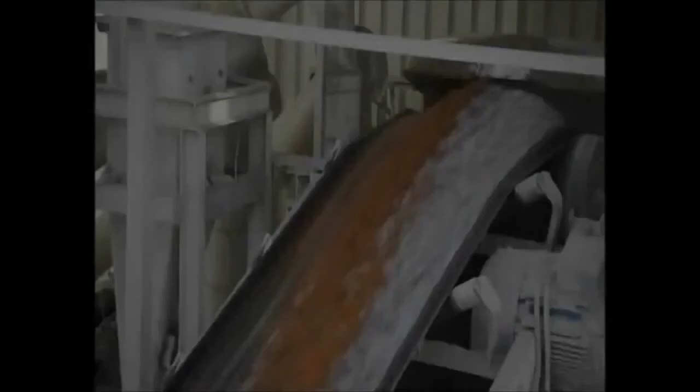Concrete. It's the most used building material on Earth. It was the building block of the Roman Empire. Today, it's the material for a new generation of gravity-defying skyscrapers. The raw ingredients that create this magic formula can be found in nearly every country on Earth.

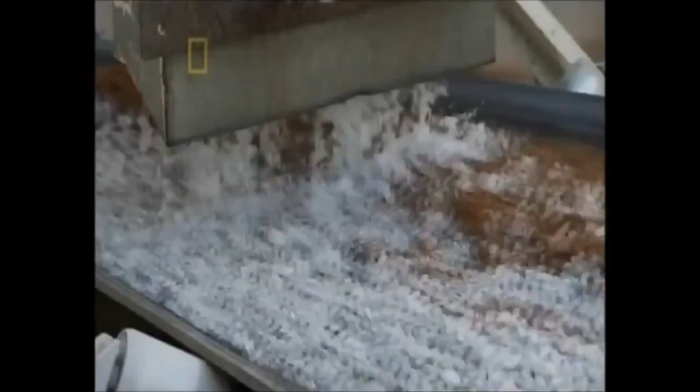Yet how these simple components are mixed together can make the difference between tragedy and triumph. From the mundane to the massive. From the ordinary to the extraordinary. Concrete helped pave the way for innovation and laid the foundation for the world's greatest civilizations. Now, go inside the science of concrete.

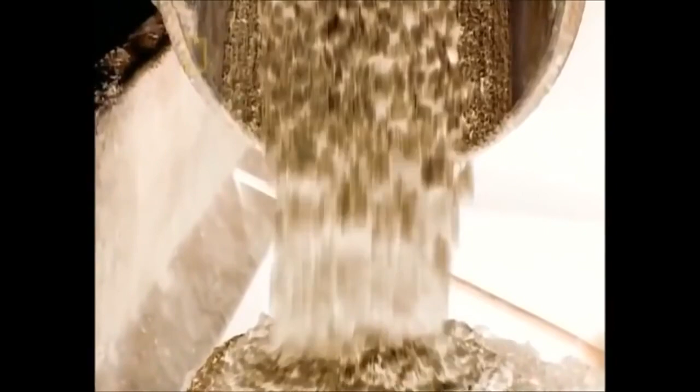It starts out like liquid. When it dries, it becomes stone hard. This amazing metamorphosis has earned concrete the nickname liquid rock. It has served as a cornerstone of engineering for centuries. And it's a highly prized tool of construction for a reason.

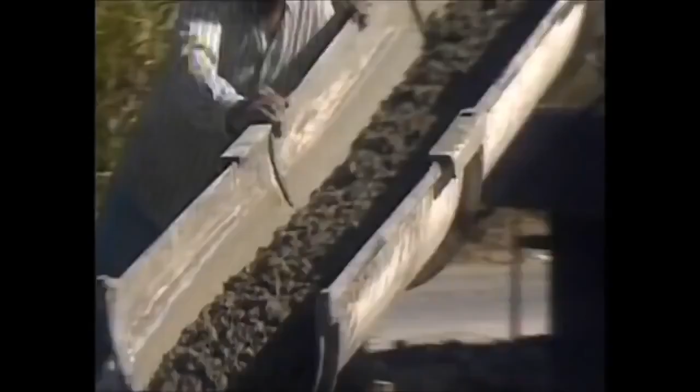It's easy to take concrete for granted. People see it in sidewalks and roads all the time, every day. But in fact, it is the closest thing to a miraculous material in construction that we've ever had. Concrete is everywhere. It has an almost unlimited engineering potential. It can take on nearly any shape and forms the backbone of a variety of the world's construction.

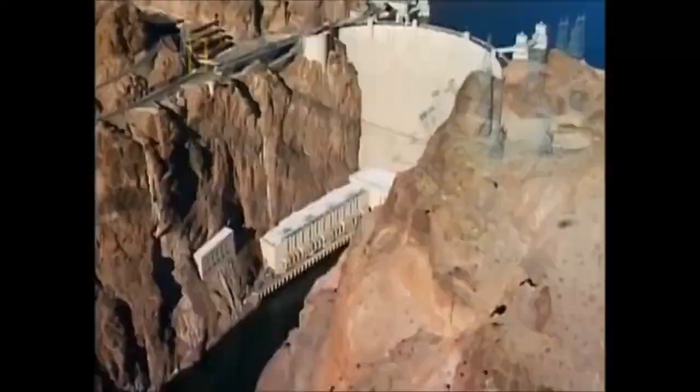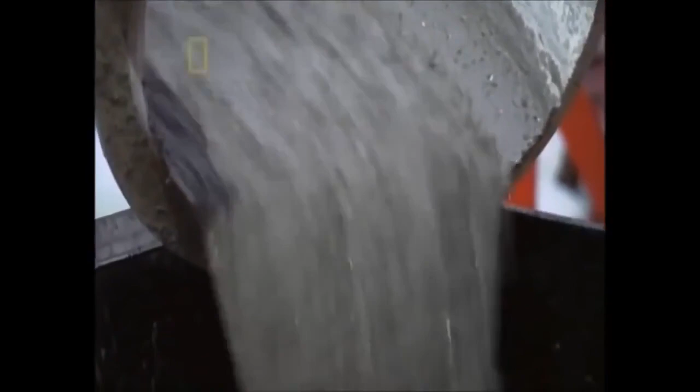Superhighways, massive bridges, man-made waterways, mega dams, the world's tallest skyscrapers. This miracle material begs the question, how does it do it all? I worked on a lot of jobs, and basically they all have a different formula for their concrete. Now I can't imagine the world without concrete.

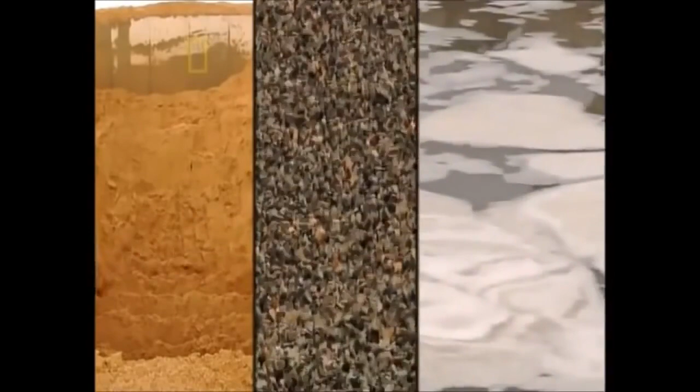The basic formula for concrete is simple. Sand, crushed rock, called aggregate, water, and the heart of the concrete mix, cement. Cement, it is the grey, powdery material that acts as a glue that sticks all of the concrete together. It covers and coats all of the gravel, the sand, and the rock as a way of gluing and binding the whole material together.

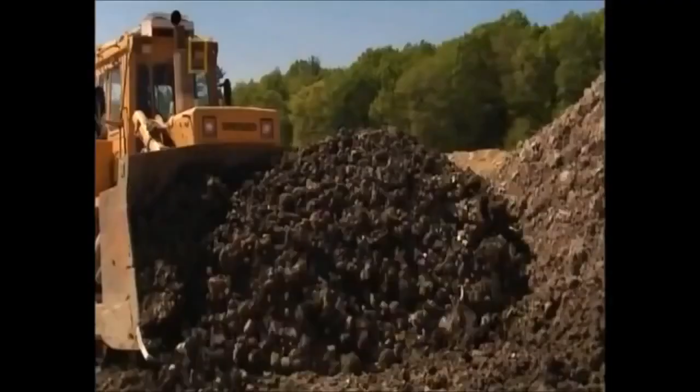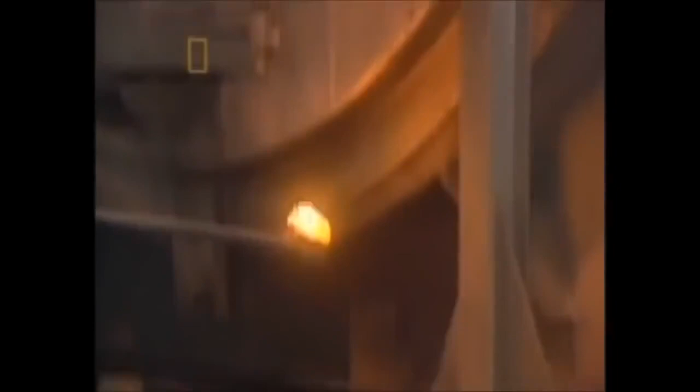To make cement, you need limestone, clay, and other elements like iron. These ingredients are crushed and combined into a powder that's poured into a kiln. The massive cylindrical spinning kilns heat the mixture to a temperature as high as 2,700 degrees Fahrenheit. The mixture becomes partially molten, forming a new marble-sized component called clinker. Once cooled, machines grind clinker into a superfine powder we know as cement.

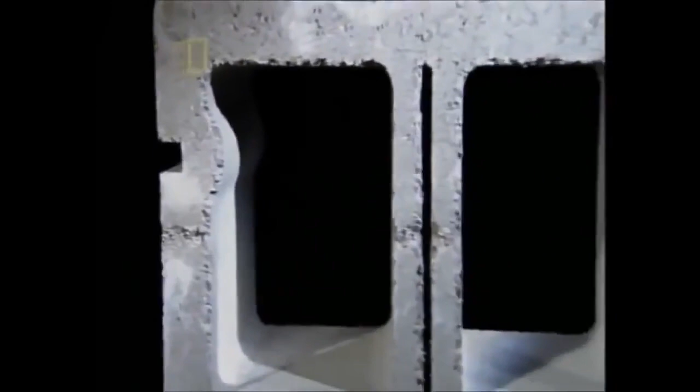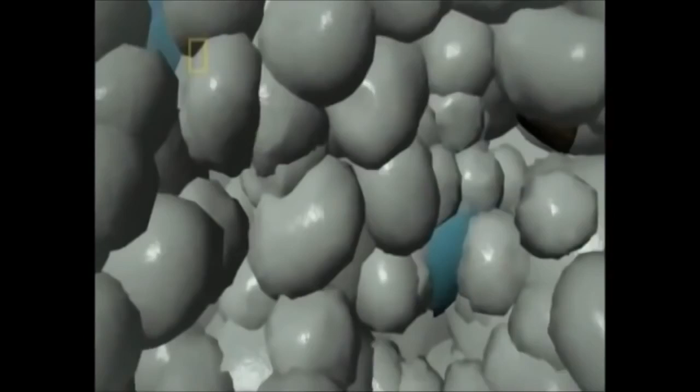Cement binds the ingredients together. When added to sand, water, and crushed rock, the cement reacts, linking the raw elements into one powerful whole. Water is the key. When cement reacts to the water, it undergoes a transformation called hydration. During this reaction, a node forms on the surface of each cement particle. The node grows and expands, linking up with other nodes. It sticks to the crushed rock and sand in the mix. Cement binds these ingredients. As it solidifies, concrete becomes a building block of modern construction. This basic process hasn't changed in over a century.

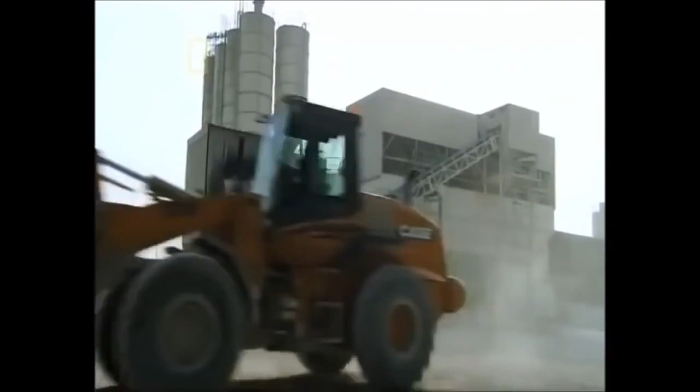But creating concrete is no simple matter. Making the right recipe requires precision and flawless preparation. It is a synergy of ingredients and timing. In a way, making concrete is like making a cake. There are lots of different recipes to make a cake. You get different flavors, different colors, different textures, but there are also lots of ways that you can make a cake wrong. It's not going to set properly, or it can come out in a way that's very different from your intentions. Getting the recipe right is everything, and the consequences of a flawed mix can be deadly. The residents of Mexico City learned this the hard way.

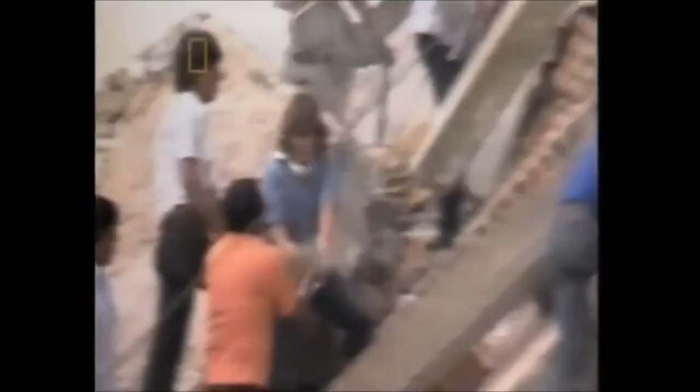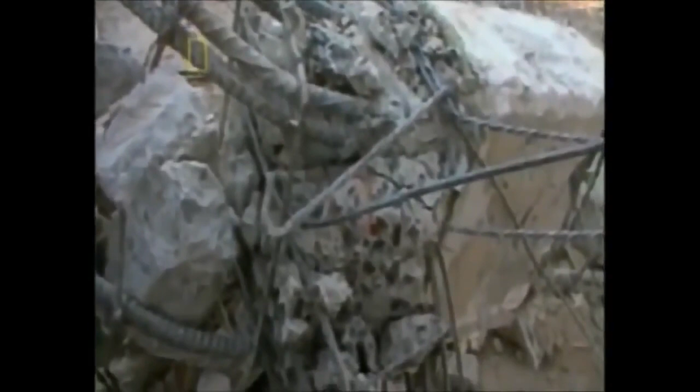On September 19th, 1985, the Mexican capital is rocked by an 8.1 magnitude earthquake. It causes up to $5 billion in damages. Investigation of the rubble reveals that many of the buildings had been made of a substandard concrete. Yes, we saw examples after the Mexican earthquake where when you use inferior concrete and you skimp on the rebar, and we saw both extensively in Mexico City, the concrete doesn't have its expected strength.

The result is walls would fracture and shear and the building would collapse when the expectation would have been that the building should have easily survived to preserve health and safety. The consequences of this quake are tragic. An estimated 10,000 die. Another 50,000 are injured.

But with the right formula, structures made of concrete can endure thousands of years. Although other civilizations, including the Egyptians, experiment with concrete, the Romans transform it from a supporting material to a main substance. In Rome, liquid rock fuels the dreams of an empire. The word concrete even originates in Rome. From the Latin concretus, it means grown together or compounded.

Roman concrete contains the traditional ingredients of sand, water, and crushed rock. But volcanic ash from the hills of Pozzuoli, Italy, transforms the material.

The Romans were very astute architects and engineers, and they recognized that by mixing volcanic ash from near Pozzuoli in Italy, they were able to get a concrete that became very hard. This volcanic ash proves to be an adhesive binding agent. It gives ancient Rome a powerfully strong concrete. This innovation allows the Romans to craft an empire from the ground up. Concrete becomes the backbone of a dizzying array of structures, aqueducts, bathhouses, and markets.

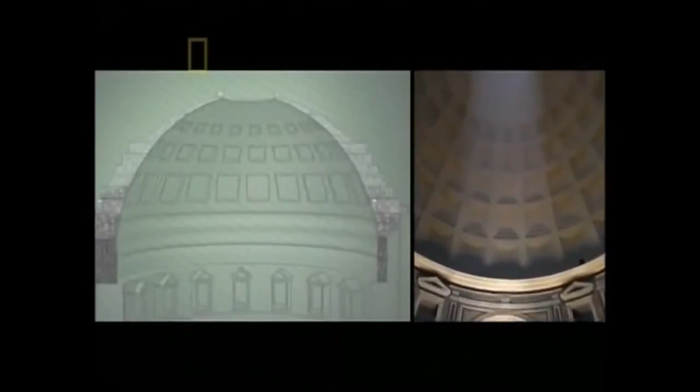Constructing an unreinforced concrete dome on the scale of the Pantheon is just an incredible engineering achievement. You couldn't do something today because everybody would have appraised the odds of your success as so small you would never get a chance to do it. The dome of the Pantheon is a stunning example of how Roman concrete could be built to last. Each layer of the dome becomes less dense the closer it gets to the top. At its weakest point, the Romans designed an oculus which reduced weight and stress. These innovations continue to impress engineers almost 2,000 years later.

For 1,500 years, that was the largest dome ever built by man. There aren't many engineered structures that stand that kind of record of time. And then all the countless uses the Romans made for engineering aqueducts and other structures, roads, that made their civilization come together. So it's very difficult to imagine the Romans without concrete technology.

The Pantheon's one-two punch of engineering know-how and architectural innovation influenced many structures to come. Thomas Jefferson's Rotunda at the University of Virginia, the Low Library at Columbia University, but none comes close to the Pantheon's lasting power. With the fall of the Roman Empire, concrete is relegated to a supporting role. It is no longer the building material of choice. All that remains is the engineering brilliance of the Pantheon and other Roman structures made of concrete.

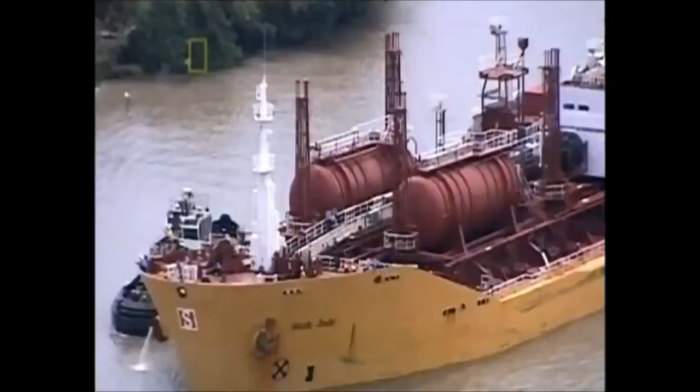Nearly 2,000 years later, builders would ask an almost impossible question. How do you conquer the land mass between two oceans? It holds more than 52 million gallons of water. It cuts a path straight through the heart of a nation. It is safely navigated by more than 12,000 ships every year. The Panama Canal. It's not one of the world's great rivers. It's an entirely man-made waterway. And the material that controls this much water is liquid rock, concrete.

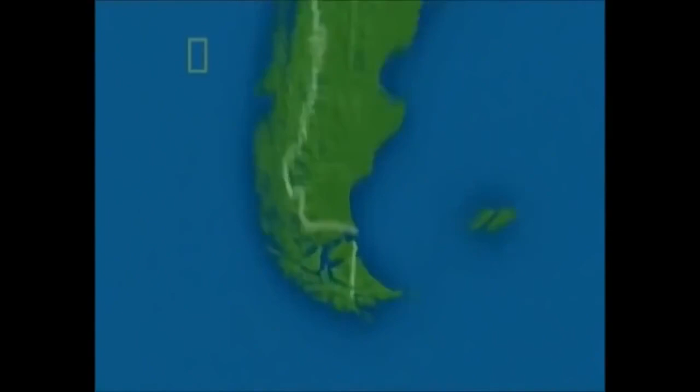By the late 19th century, the idea of a canal connecting across the isthmus somewhere in Central America had been floated for some time. Before its construction, a trip by boat from New York to San Francisco meant sailing 13,600 miles and crossing through the deadly waters of Cape Horn. The importance of the Panama Canal cannot be underestimated because before it existed, all shipping had to take place between the Atlantic and the Pacific Ocean by going around Cape Horn, which is very treacherous, very severe storms for many months of the year, and many ships have been lost.

The massive storms along the Horn had been sending skilled sailors and precious cargo to the depths of the ocean. The world needs a better route, a safer route. February 1st, 1881. Ferdinand de Lesseps, the architect who crafted the Suez Canal in Egypt, decides to build another waterway through the country of Panama. Standing in his way are 51 miles of dense tropical jungle, torturous heat, and the fortress-like walls of Panama's central mountain range. How do you cut through the Continental Divide?

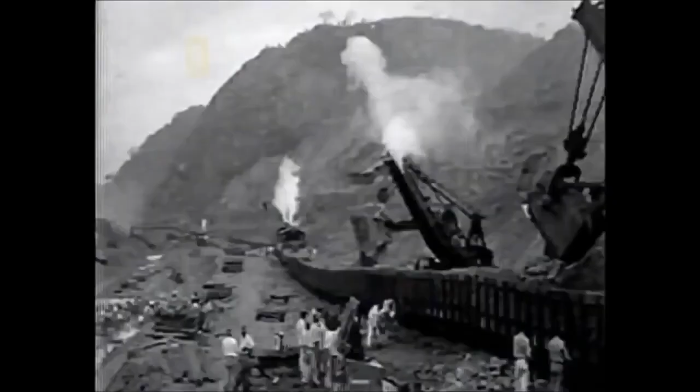Unfortunately, they hadn't talked to the rock. If the devil could have designed a material to plague poor de Lesseps, he would have made this material. As soon as you expose it to air, it oxidized. You'd excavate, and it would slide in. It ended up to be just an impossible project. De Lesseps' Panama Canal project quickly meets with disastrous consequences. 22,000 workers die due to landslides, tropical disease, and dynamite. After 8 years, the French abandon the canal project. But the French failure is not simply due to disease and the mounting death toll. From an engineering standpoint, their plan is flawed.

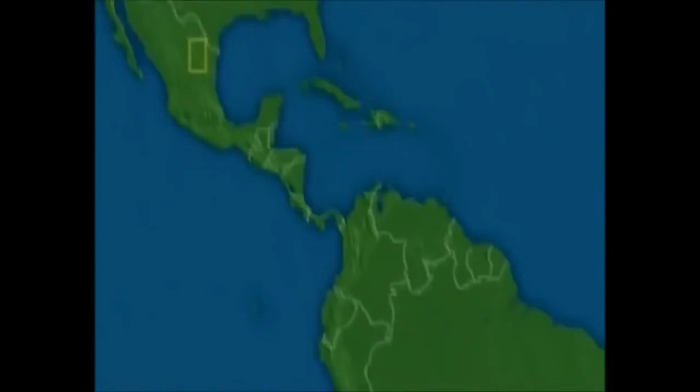With the American economy booming, an ambitious young nation takes over the canal project. President Teddy Roosevelt decides that U.S. workers are up to the task. American engineers learn from the French mistakes. The French tried to carve out a sea-level route through the difficult terrain, just like the Suez Canal. Instead, Americans use a series of chambers known as locks. Locks are simply big concrete tubs that you put between two bodies of water that have different elevation. You put a concrete tub between them, and the tub has got to be higher than the highest water. And then you put doors on each end of the tub, watertight doors.

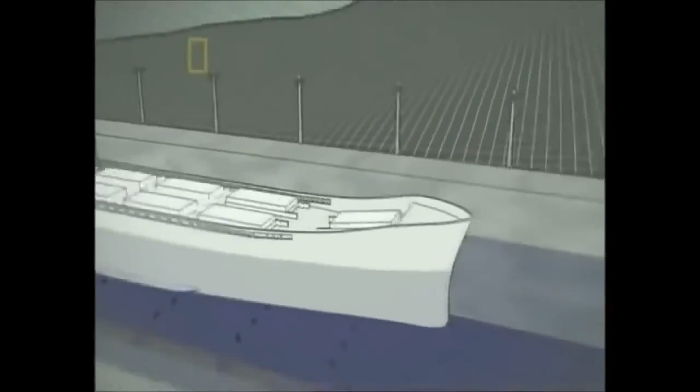These chambers with doors fill with water, allowing ships to rise in steps. The ship crosses an artificial lake, then descends along a series of locks to the other side. It's just a concrete tub with doors on each end that raises things from low water to high water, or the reverse works just fine. You open the high water end, sail in the ship, close the doors, turn on the pipes down here, the ship settles down to the low level, open those doors, and off you go.

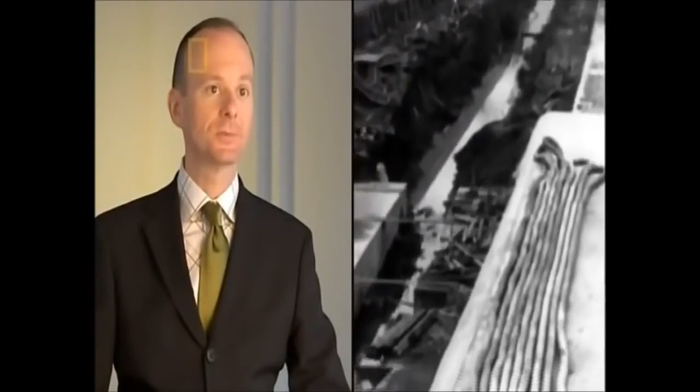With enough concrete, they hope to dam the Chagres River. By redirecting the river, they will feed the artificial lake and fill the locks. And the best option for the locks is liquid rock. Without concrete, the Panama Canal would have been almost inconceivable. Certainly canals had been built before that. It's something that could be done, but at the scale that we were talking about, especially with the goals that they had in terms of timing, it would have been very, very difficult to do that without concrete.

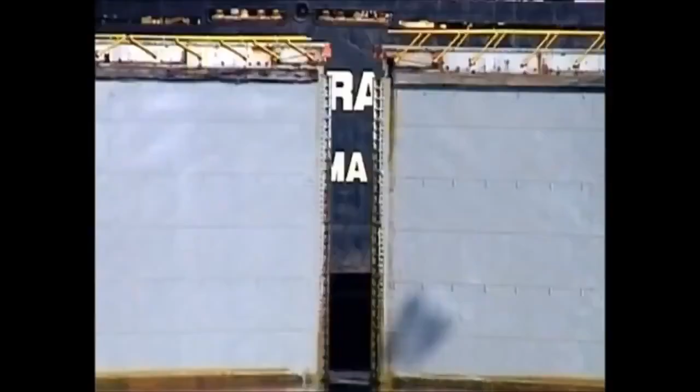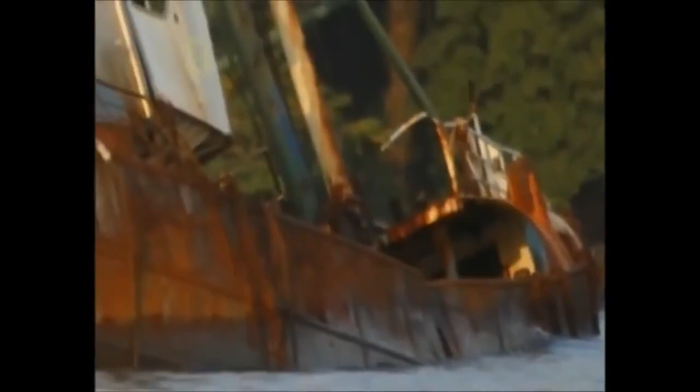The concrete locks will be a stairway bringing ships to the level of the lake. But they will need a high-strength concrete that can hold 26.7 million gallons of water for each lock. That's the equivalent of over 40 Olympic-sized swimming pools. Construction begins in 1904. About 4.5 million cubic yards of concrete were used in the construction of the Panama Canal. And because so much concrete was needed, they had to set 8 on-site batch plants in order to produce that much concrete.

Other materials, like steel or aluminum, can rust or corrode in water. The advantage of concrete is that water can make it stronger. Concrete needs water to complete its chemical reaction. If there's a little extra water around while it's going through the reaction, it just makes sure that all the concrete goes to completion in terms of its hydration. That's the chemical bonding caused by the water between the cement and the aggregate and the sand.

In order to prevent leaks, the concrete mix for the locks has to be very dense, not allowing any water to seep through. The concrete that you need to build a canal is not the kind of concrete that you need if you want to design a skyscraper. The recipe for the locks will try to be leak-proof. To solve this problem, builders choose smaller rocks for the aggregate in the mix. Tests show that adding finer aggregate creates a less porous concrete. The goal is a leak-proof lock that only expels water when the doors open.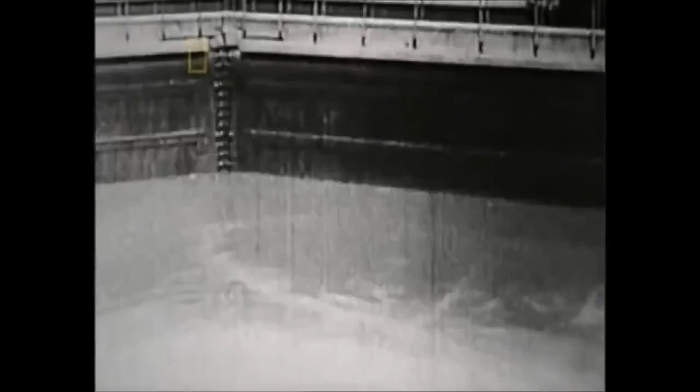With the mix just right, engineers begin building the locks that will control the waterway between two oceans. At the Gatun locks on the Atlantic side, each lock chamber is big enough to hold 3 Statues of Liberty, laid end to end, with room to spare. At these locks alone, workers pour more than 1.53 million cubic meters of concrete. These locks link to the artificial lake made by damming the Chagres River, Gatun Lake.

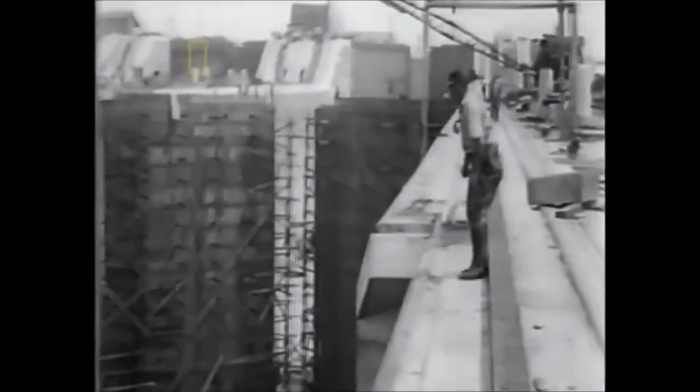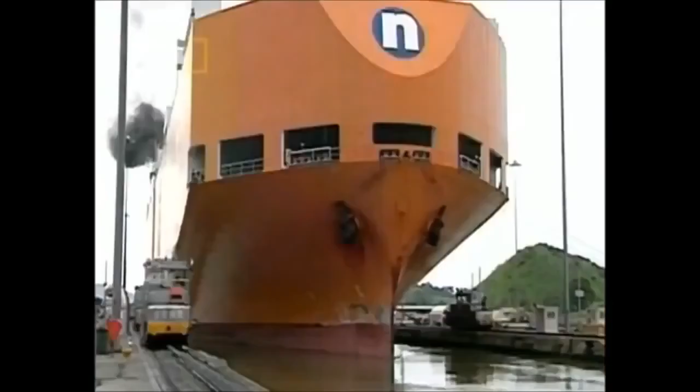9 years of construction. In May 1913, the last bucket of concrete is poured at the Gatun locks. Engineers prepare for the canal's first trial run. The tugboat Gatun travels through the locks on September 26th of that year. The locks work flawlessly and open for business 1 year later. Few engineering endeavors have changed the geography of the planet like the Panama Canal. After nearly a century in action, the concrete of the Panama Canal has stood the test of time. No other material has withstood wear and tear in the same way.

Concrete linked 2 oceans, but an even bigger challenge awaits. How will concrete tame one of America's wildest rivers? Now go back inside the science of concrete. It has been called an American pyramid. The mighty Hoover Dam is a testament to the power of concrete.

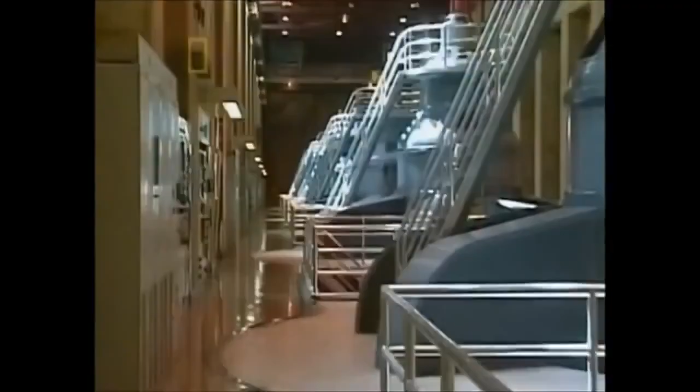Weighing 6,600,000 tons, this concrete colossus holds back 45,000 pounds of water per square foot. The force of this water generates hydroelectric power for over 1 million people. From the neon lights of Las Vegas to the freeways of Los Angeles, this hydroelectric dam generates 2,080 megawatts of electricity. The Hoover Dam's construction redefined what the world could do with concrete, but it also rerouted one of America's greatest rivers, flooding ancient canyons, reshaping the area's natural habitat.

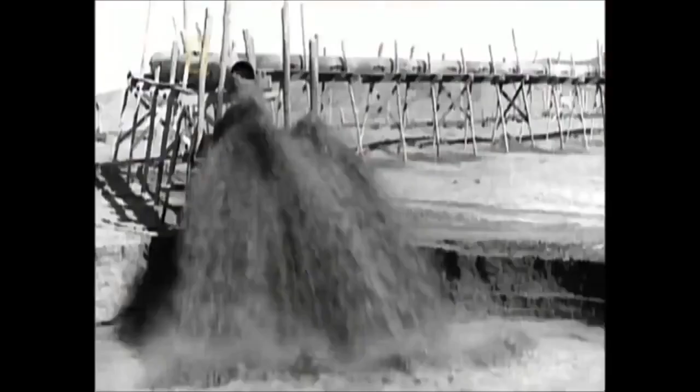In 1905, the Colorado River breaks free of a man-made canal. It floods Lower California across 150 square miles. Epic floods wipe out thousands of farmers. Millions of dollars are lost. The Colorado is unpredictable.

The Southwest also has another problem: power. The boom towns of Los Angeles and Phoenix are growing at a rapid rate and desperately need energy. Raging floods and lack of power. Two different problems. But engineers believe there is one answer to both: dam the Colorado River.

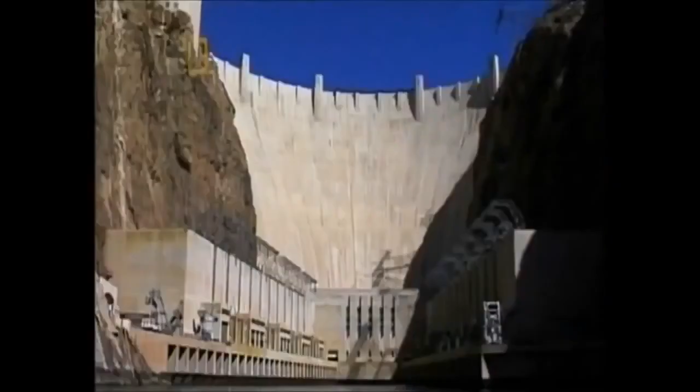A hydroelectric plant would harness the natural power of the Colorado and, using simple mechanics, convert that energy into much-needed electricity. You're generally looking in the construction of a dam for a huge, solid structure. It's really about holding back enormous quantities of water. The dam needs a material that is strong enough to hold back the raging Colorado. And since the location would be remote, able to be made on site, one material can meet all of those requirements.

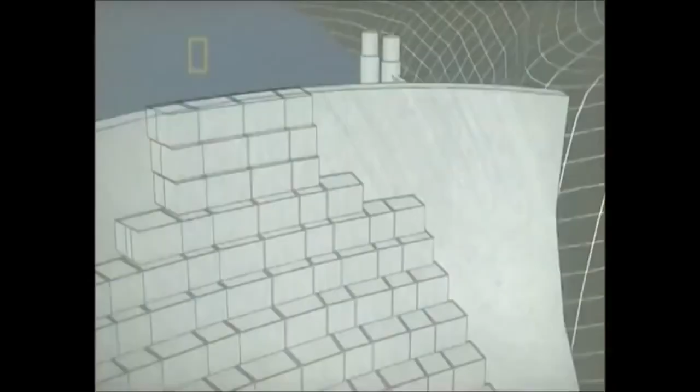It's hard to imagine the Hoover Dam being built out of any material other than concrete. Using steel on this scale would be too costly. But to make the Hoover Dam, engineers would need more concrete than had ever been used before in one project. The dam will be 726 feet high and 1,244 feet wide.

With a structure this big, it will be impossible to do one massive pour of concrete. The amount of material that went into this dam was so enormous that there's no way to pour the concrete in one segment. So what they did is they divided the whole dam into lifts and then into individual blocks. The Hoover Dam needs to be built as a series of individual blocks that will interconnect. Trapezoidal in shape, the blocks rise in 5-foot lifts. This crucial engineering element allows the project to progress in stages.

Something on that scale being built in concrete had not been built before. Hundreds of pounds per square inch, thousands of pounds per square foot on the base of the dam, trying to push the dam downriver. And now you've got the Hoover Dam to stand this incredible water pressure trying to push it down the river. Chief Engineer Frank Crowe knows the completed dam will have to hold back 45,000 pounds per square foot of water. For this, they need a special high-strength formula.

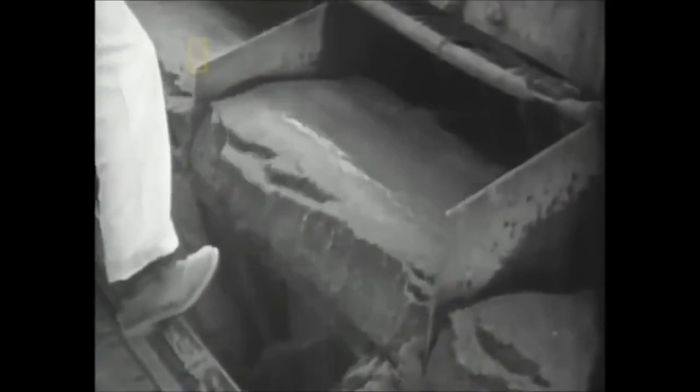Crowe's solution? A minor but crucial modification to the standard concrete formula. A very dry mix, one that uses less water. More water makes it more workable, but shrinks more, and shrinkage causes cracks. The less water, down to 7%, the better and stronger the concrete.

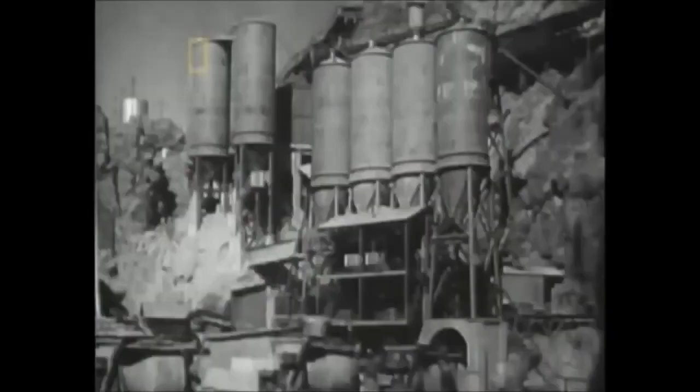The dam's remote location also means crews will have to build 2 concrete mixing plants on site. Shipping a very dry concrete formula from a facility far away would render it useless by the time it's transported to the dam. Because speed is of the essence when working with a very dry concrete mix, the crews working the pouring cranes have to push themselves to the limit to pour quickly and accurately.

When concrete cures, it gives off a powerful heat, a result of the cement and water reacting to make the rock-hard substance. The process by which concrete cures, we call an exothermic reaction. By that I mean it gives off heat. And indeed, if someone pours a sidewalk or driveway around you, right after the slab dries enough to touch, put your hand on it. It'll feel warm. That exothermic, it gives off heat. You can feel sensible heat.

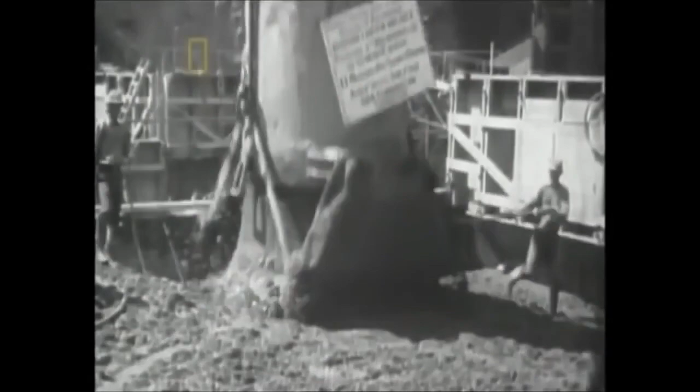As the amount of concrete going through this chemical reaction gets bigger and bigger, the amount of heat that's given off gets bigger and bigger. Engineers calculate that if the dam were built in one continuous pour, the concrete would get so hot that it would take 125 years for it to cool to normal temperatures. The extreme heat would also cause the concrete to crack and crumble away.

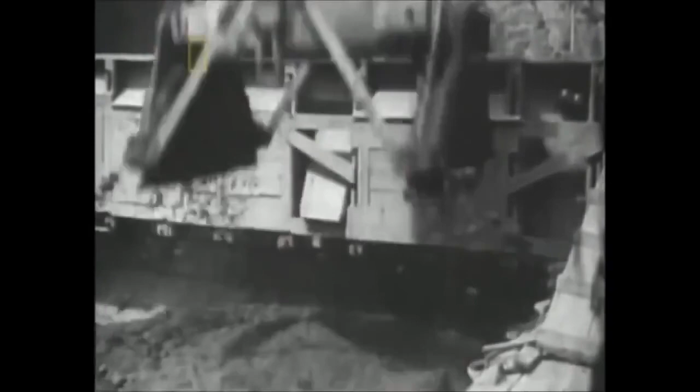Concrete dries from the outside in. If the concrete is not evenly cooled, it can crack, putting the stability of the whole structure at risk. Instead, Frank Crowe and his team of engineers have an innovative solution. Each block is outfitted with coils of thin-walled steel pipe. When the concrete is first poured, water from the Colorado River circulates through these pipes.

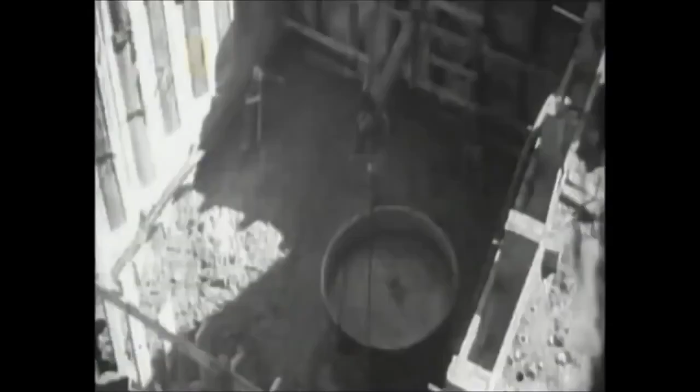The idea is to initiate a cooling process, but one done in stages. Cooling the concrete too quickly will cause it to crack. After the concrete has received its initial cooling, chilled water from a refrigeration plant is circulated through the coils to finish the cooling process. As each block is cooled, the pipes are cut off, and they are filled with grout by pneumatic grout guns, pumping 300 pounds per square inch of filler.

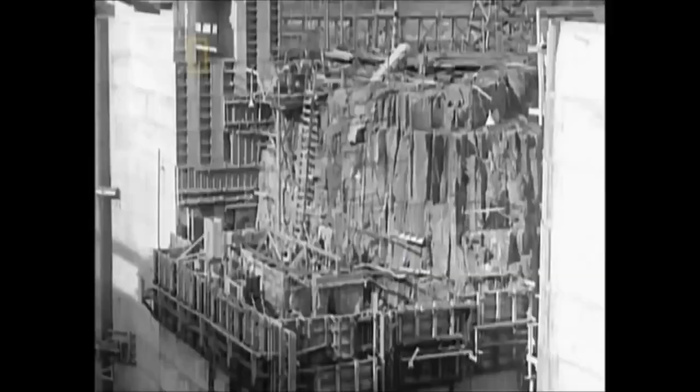Once the individual blocks have cooled and set, there is one final challenge. In order to prevent hairline fissures between the blocks from weakening the dam, the individual blocks are formed with vertical interlocking grooves. When the concrete has cooled, grout is forced into these joints, bonding the entire structure into a monolithic concrete giant. This method takes advantage of one of concrete's fundamental properties.

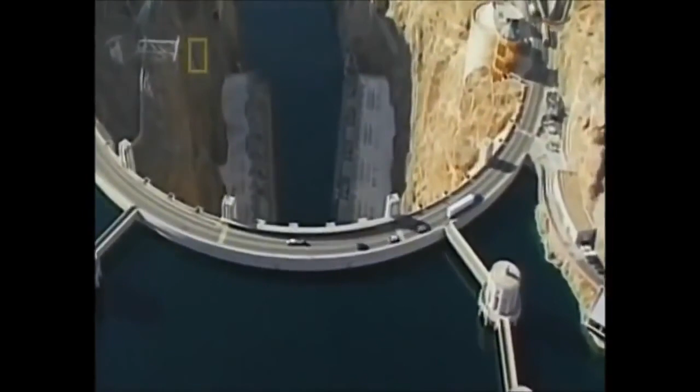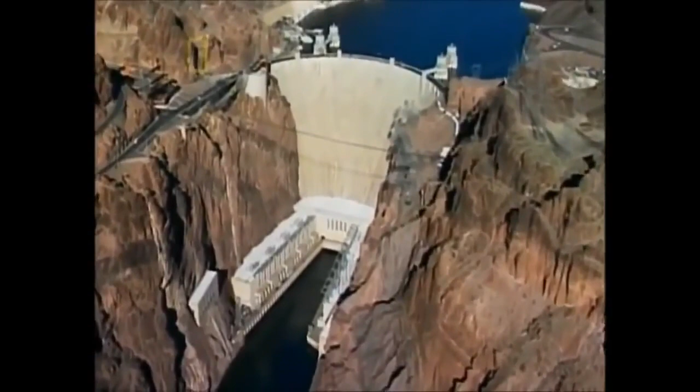Well, concrete loves compression. The more it is forced together while setting, the stronger concrete becomes. As a result of this property, the Hoover Dam is arguably stronger today than it was on opening day, 70 years ago. The Hoover Dam is a testament to engineering know-how and a skillful use of concrete. The dam contains enough concrete to pave a strip 16 feet wide and 8 inches thick from San Francisco to New York. More than 5 million barrels of cement were used in the Hoover Dam, and a total of 21,000 men worked on its construction. And it represented an enormous engineering achievement to build successfully. It took the lives of over 100 men to build that dam.

Today, the concrete mega dam is nothing new. But Hoover set the stage and showed the world that concrete could do the job and help generate much needed power. It changed the course of one of America's wildest rivers.

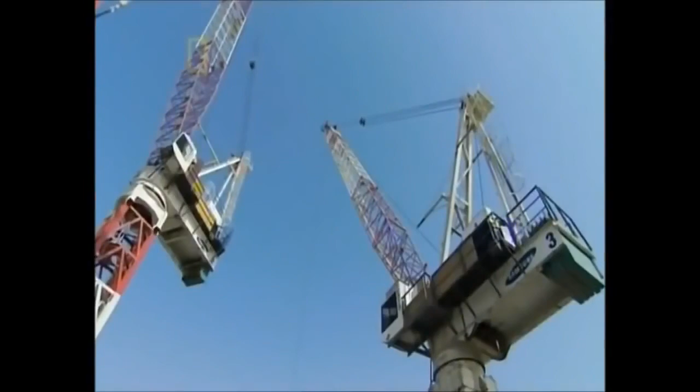Now the question is, can concrete conquer the skies? In the scorching Persian Gulf, a growing structure cuts the horizon. Its expected height is a closely guarded secret, but experts around the world agree the Burj Dubai may be the world's tallest skyscraper. It'll be the tallest building, for sure, the overall title holder for some time to come.

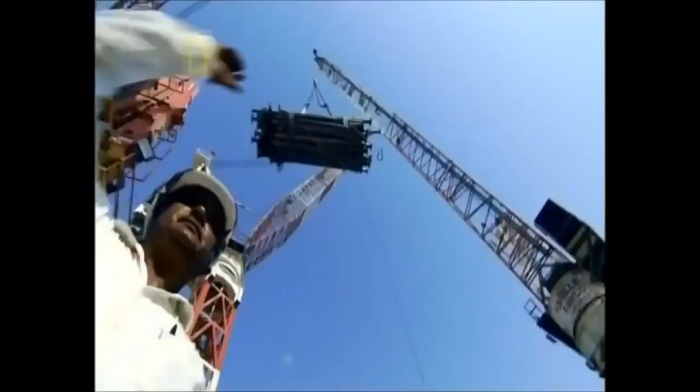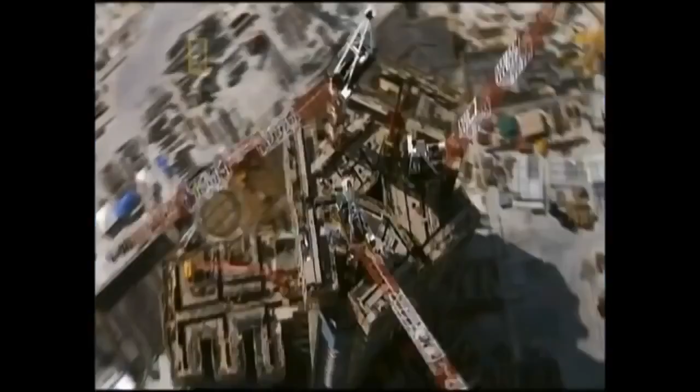A construction project this massive needs 11 cranes and the world's fastest high-capacity construction elevators. The building rises at the breakneck pace of 1 floor every 3 days. And from the walls to the floors, to the columns to the stairs, much of this desert skyscraper is concrete. More than 160,000 cubic meters of it. At more than 2,000 feet, the Burj Dubai will be the crown jewel of the United Arab Emirates and is a shining example of a new generation of skyscrapers that seek to dominate the skies.

It is a far cry from the humble beginnings of the concrete skyscraper, more than a century ago.

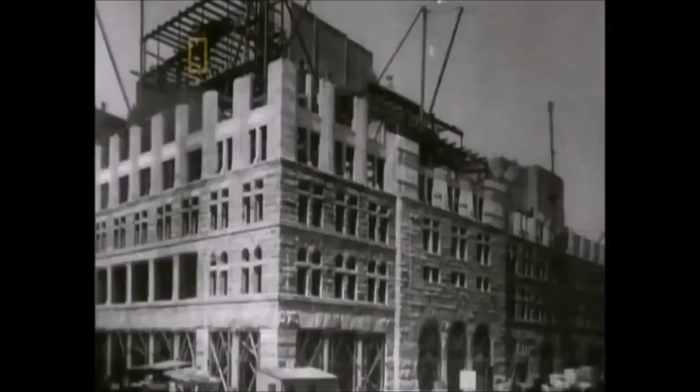At the beginning of the 20th century, the building material of choice was not concrete, but steel. You can build a hell of a skyscraper with steel. In fact, the Empire State Building is so overbuilt, you could probably add another 30 stories to it under today's building codes, and it would still comply fine. So, steel was a great material. You can build a great building from steel, but it's an expensive way to go.

Steel is not only costly, but represents a challenge for a new generation of skyscrapers that grow increasingly higher. And if you're going to go tall, the building's got to be stiff. It is so much easier to make those thick, stiff walls from reinforced concrete than steel that it's a no-brainer. The Petronas towers in Malaysia are concrete, and this new one in Dubai is going to be concrete. If you're going to go that high, it's going to be concrete.

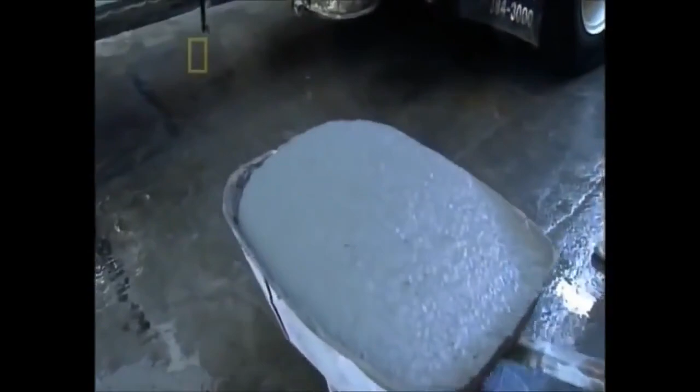The stiffness of concrete, combined with its availability and relatively low cost, have made it the building material of choice for these new skyscrapers. As our experience and comfort level with reinforced concrete came along, and as the buildings started getting taller, reinforced concrete really became the material of choice.

Before 1902, the tallest steel reinforced concrete building is a paltry 6 stories tall. The Ingalls building in Cincinnati changes that. Engineer Henry Hooper dreams of a monolithic building of concrete, a skyscraper 16 stories tall. But many engineers believe that a concrete tower 16 stories high will collapse under strong winds or even its own weight.

When Hooper finishes his building, there are many skeptics. There's one anecdote that says a reporter actually stayed up all night waiting for the Ingalls building to collapse because he was so certain that it was going to. Needless to say, the reporter was disappointed in the end. It is a towering success for its time. But at 210 feet, it is just one in a dizzying array of modern-day skyscrapers.

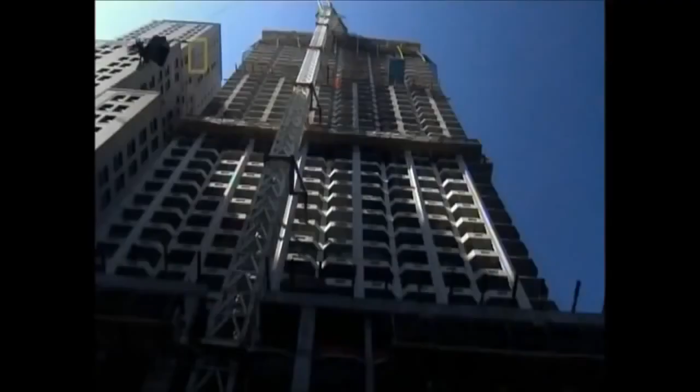More than a century later, the towering dream of Dubai aims to be over 10 times the size of the Ingalls building. Every morning, workers assemble in the garage of the building. Erecting this much concrete in the punishing heat of the Gulf requires serious manpower. But before workers can pour a drop, the perfect formula needs to be mixed at the batch plant.

The first problem this leviathan from the desert faces is its own height. The taller a building, the more it flexes, increasing the likelihood that it could flex to the breaking point, a deadly proposition. Older skyscrapers like the Empire State are safe because they use massive steel beams and braces.

But erecting a tower nearly twice as high requires a material with even greater shock-absorbing qualities. If you take something like the Empire State Building and the wind blows on it, the wind creates pressure, which tries to bend the building over. But as you go higher, imagine going twice the height of the Empire State Building. The wind gets more surface to work on.

Indeed, buildings collapse when the flex is so great that the weight of the building gets outside of its footprint and the building doesn't have strength enough to handle that. Down it comes. Builders will need a formula that is almost as strong as cast iron, yet more resistant to damage due to vibrations from the wind.

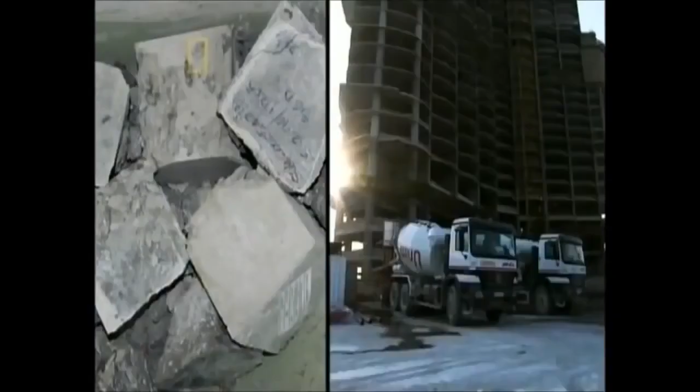After extensive computer and wind tunnel testing, the architects behind the Burj Dubai will use a high-strength concrete formula. It contains slag, a byproduct of the steel industry, and microsilica, which gives the concrete added strength.

If you look at the microstructure of concrete, there are many spaces between the particles that are either hollow, which we call pores, or filled with water. Microsilica plays the role of filling these pore spaces, and therefore makes concrete much more dense, more durable, and stronger.

And in order to make sure that the formula is consistent, Alam Feroz, quality control manager for the concrete of the Burj Dubai, routinely tests the concrete before it is used in the skyscraper.

I'll give you an example. If you're giving blood to a patient, how important is it for the blood to be tested before you give it to the patient? It's a big risk. Same with the concrete. When it has been tested, I get confident that whatever I'm giving to the structure is being tested and it complies to the requirements. It won't be just a mere guess.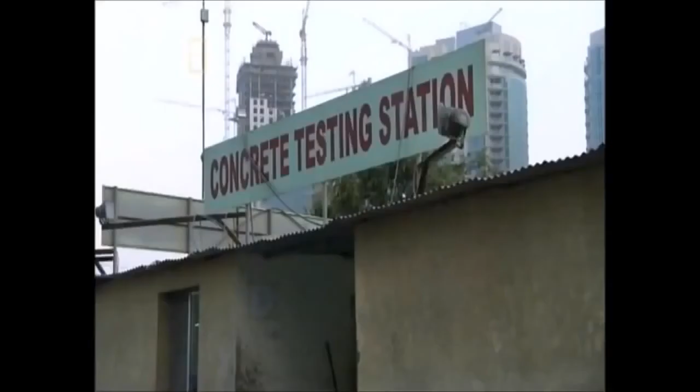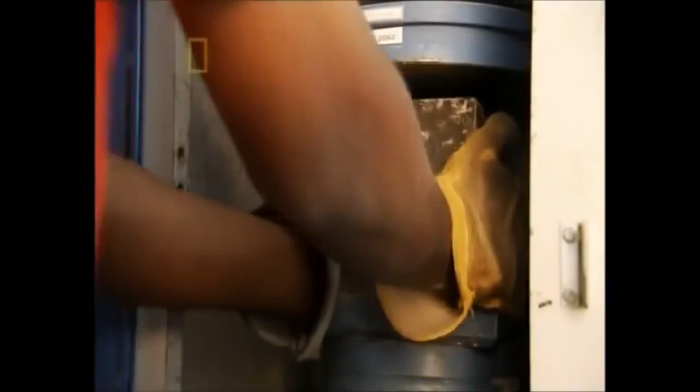To test the strength of the concrete, small cubes are hardened in cool water. Next, the concrete is deposited into a crusher for a stress test. This cube holds up to nearly 14,000 pounds per square inch, making it a high-strength concrete. The concrete test has been successful.

But as strong as this formula is, it still has to contend with desert heat. Temperatures top 120 degrees. How do you keep concrete cool in the desert?

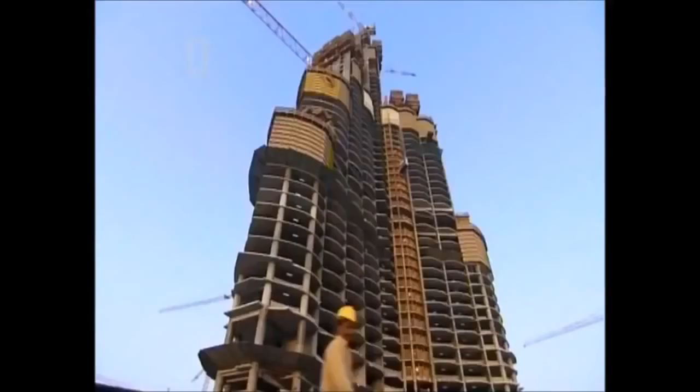But the building's guts are solidly concrete. When it's finished in 2008, the Burj Dubai will be the tallest building in the world. Like the Ingalls, the Burj Dubai has set the standard for its day, showing once again that concrete can be used in a variety of ways for the world's tallest buildings.

Now, reinforced concrete is establishing itself as a building material of choice for skyscrapers. Concrete has conquered the skies. Concrete's next quest: how to tackle the building challenges of the future.

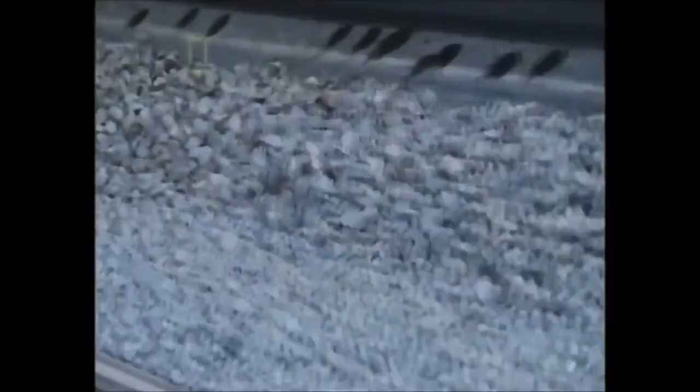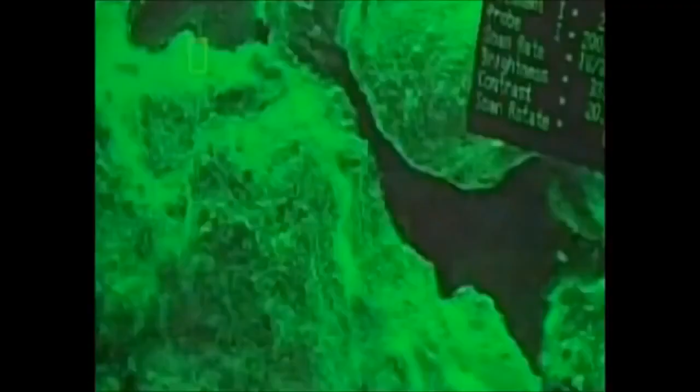Concrete has been a key ingredient in the construction of our civilization. It has been a fundamental part of our architectural past and is now paving the road for our future. Scientists are developing new formulas for concrete and are looking for ways to make it stronger, more environmentally friendly, and capable of doing things we never thought possible.

Back where it all started, at the heart of the Roman Empire, concrete has taken a new and exciting turn. Just a few miles from the Pantheon, the Jubilee Church, designed by architect Richard Meier, uses a new form of concrete.

The church was commissioned by the Archdiocese of Rome to commemorate 2,000 years of Christianity. For that, the building would need a material that was both ancient and modern, a material that would speak to the church's past and make a bold statement for the future. They would also need a material that would last the test of time.

Concrete fits the bill. This church is remarkable for several reasons. It has these three sail-like forms, loosely representing the Holy Trinity, but made in effect of giant concrete blocks. The shells of the church, which stretch out and up in the same way as the Sydney Opera House, are made of 346 white, reinforced, precast concrete blocks.

Concrete, for all of its advantages, does tend to pick up discolorations from the atmosphere. Meier, though, wanting to keep his building white, managed to work with local firms in order to achieve a concrete mix that included photocatalytic particles that absorb and neutralize the acids in the air. In effect, what you have is a pollution-eating building.

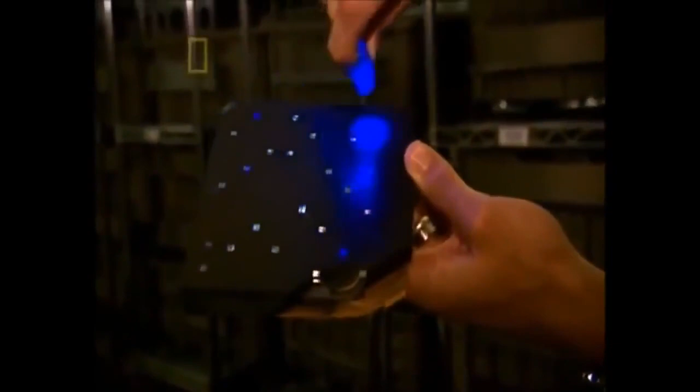Concrete isn't just working harder, it's working smarter. New developments in concrete technology now allow for what used to be unthinkable: helping the environment by using an unusual aggregate: glass.

The innovation here has been in making sure that the glass doesn't get corroded by the lime in the cement mixture. One of the biggest issues with concrete is that the Portland cement tends to be quite corrosive, and this has been a big problem with things like recycled glass. It tends to corrode, the glass falls out.

This composition of cement was actually developed by Columbia University. It is a much less corrosive, more benign cement, allowing you to put the glass chips in. So you can actually now have concrete with glass chips that actually has a good surface effect.

We are generating millions of tons of garbage, solid waste, and in New York City, approximately 6% of all solid waste is glass. That's bottles like this, yeah. And these bottles generally find their way into landfills, and that costs taxpayers hundreds of millions of dollars just to get rid of these bottles.

Concrete's versatility allows it to bind with other materials, in this case, glass. The first step is to separate the bottles by color, and then you crush them in a crusher.

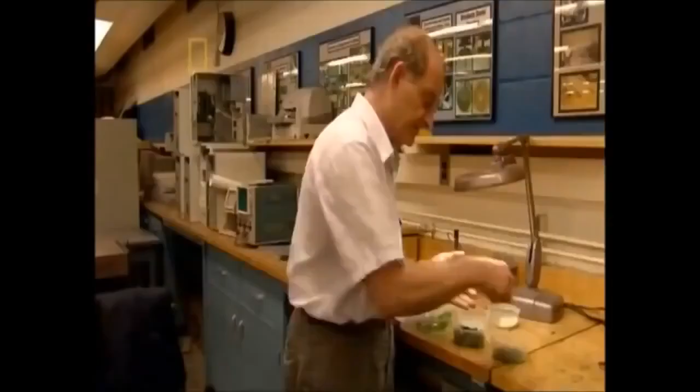Crushed glass is not something like this broken glass, which you want to handle very carefully because it has sharp edges. That was also one of the problems we were facing, because skeptics asked, well, if you use glass in concrete, won't people cut their hands by handling the blocks or whatever? The answer is no, because when you crush the bottles in a high-impact crusher, it comes out in pieces just like sand. It does not have sharp edges.

Eventually, the broken glass is crushed into a fine powder, just like baby powder, the same kind of particle sizes. So if you put this finely ground glass powder into concrete, you can replace part of the cement with this glass.

These are actually 100% recycled glass pieces added into the concrete. Initially, scientists thought that recycled glass would make for a bad aggregate, but Professor Meyer and his team have found a way.

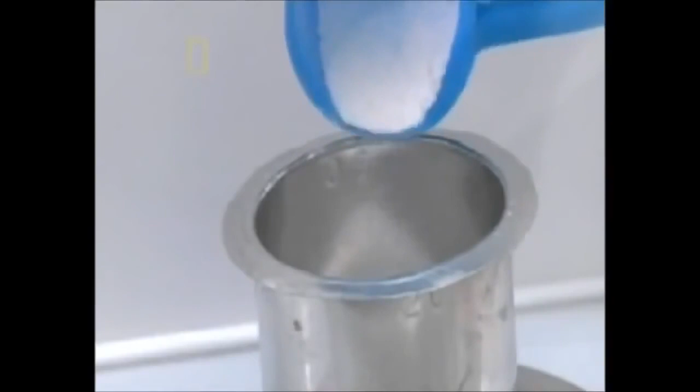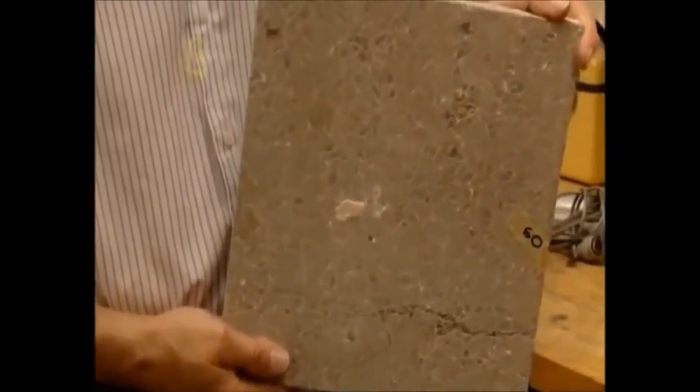Once you make concrete out of these glass particles and color coordinate that very well, then you can get something like this, and this is now already being commercially produced. Now, that's the way regular concrete would look, and this is our glass concrete, polished to a high precision, high grade of polishing. That is known as terrazzo concrete.

Using recycled glass as an aggregate is just one of the many ways that concrete continues to reinvent itself. It also may pave the future for a more environmentally friendly concrete.

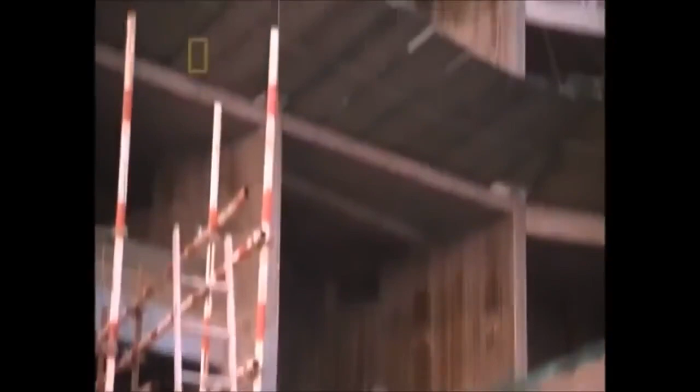There are also other developments reshaping concrete for the future. For the last 100 years, architects and builders have sought a way to allow light into concrete buildings, homes, and offices in a more efficient manner. One of concrete's biggest drawbacks is that it creates dark buildings that do not effectively conduct light. Experts are working to change this.

The same thing can happen with normal daylight as well. So the idea is that you can build a structure with this concrete and allow daylight to actually come through the structural element of the concrete.

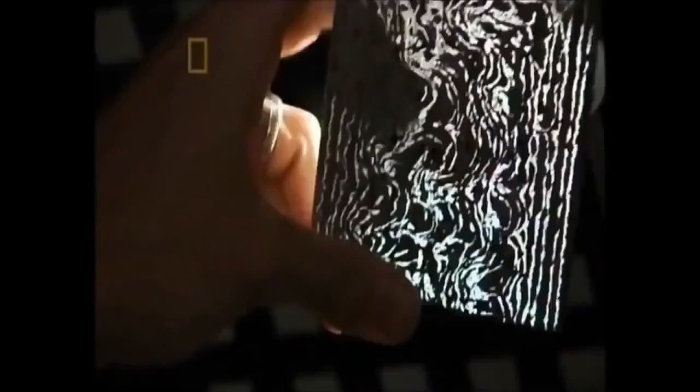Light transmitting concrete, or LiTraCon, is a unique form of concrete that uses glass fibers to conduct light. It allows for massive structures to permit light to shine through. This technology has the potential to redefine what concrete looks like.

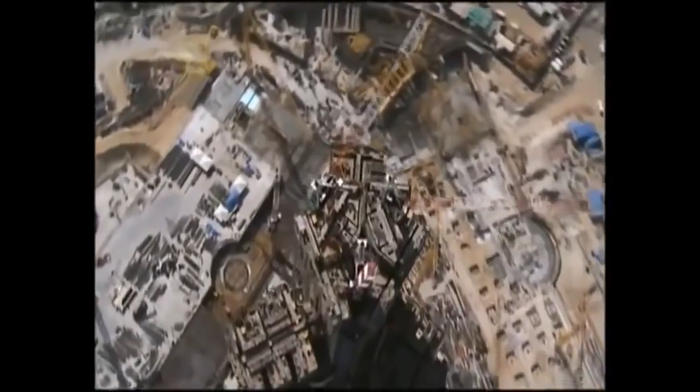Once considered cold and impersonal, these new forms of concrete are transforming the material. What started off as the most basic of building materials is now on the cutting edge of building and design. The future for concrete is virtually limitless. If concrete is anything, it is a material that continuously reinvents itself. Concrete continues to adapt to the emerging challenges of our world and is laying the foundation for our future.